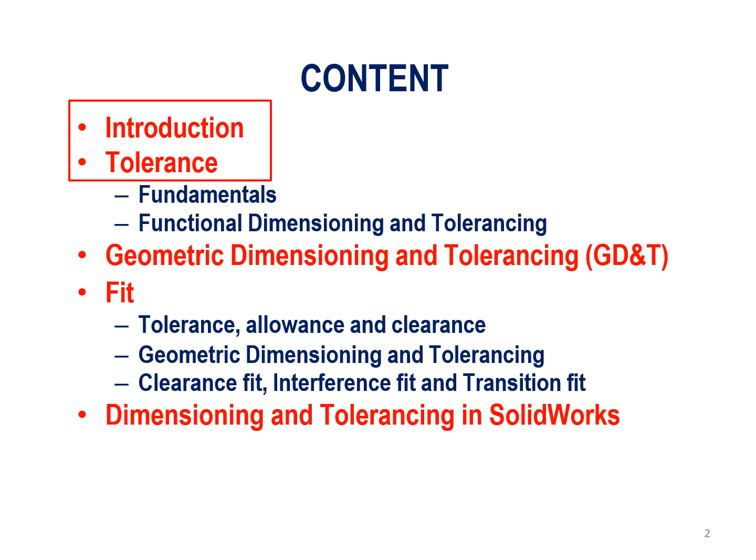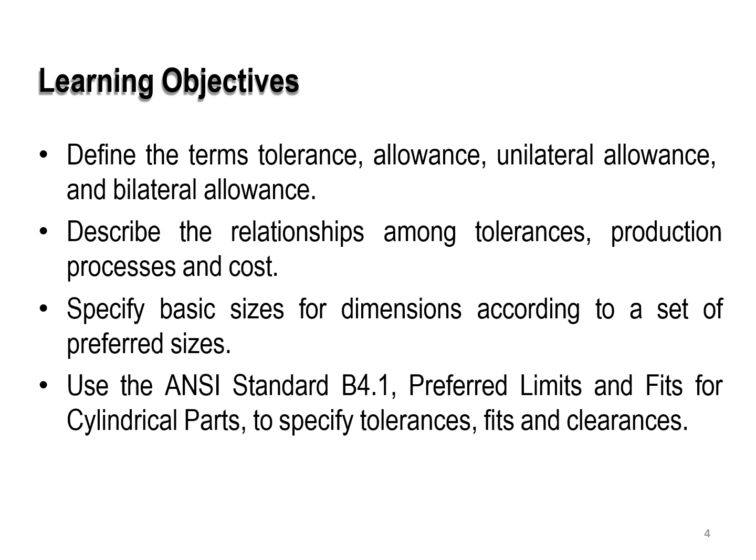The learning objectives of this slide are first to define the terms tolerance, allowance, unilateral allowance, and bilateral allowance. Also, describe the relationships among tolerances, production processes, and cost. Also specify the basic sizes for dimensions according to the set of preferred sizes. We're going to use the ANSI standard B4.1, preferred limits and fits for cylindrical parts, to specify the tolerances, fits, and clearances.

Continuing with that, we are going to specify the transitional, interference, and force fits, specify the appropriate geometric dimensions and tolerancing controls for the mating parts using the CAD software SolidWorks.

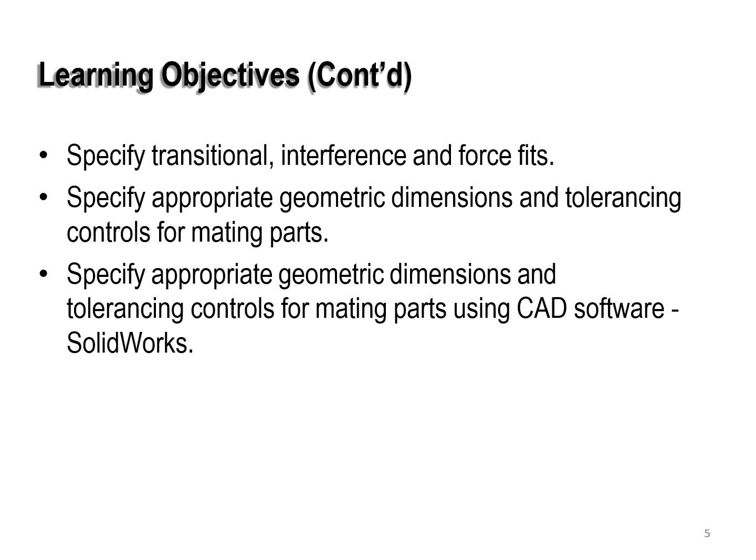So first, let's have a definition for tolerancing and fit. The ISO system of limits and fits is a coordinated system of hole and shaft tolerances for engineering and manufacturing use, for cutting tools, material stock, gauges, and so on. If held to these tolerances, the cutting tools, material stocks, and gauges are going to be generally available throughout the world. The hole basis fits have 4 preferred hole tolerances: H11, H9, H8, and H7.

So you can see that for the hole tolerances, it's mainly capital letters. The shaft basis fits have 4 preferred shaft tolerances: h11, h9, h7, and h6. The difference is we use a small letter. So something like, we're going to have a shaft go inside the hole.

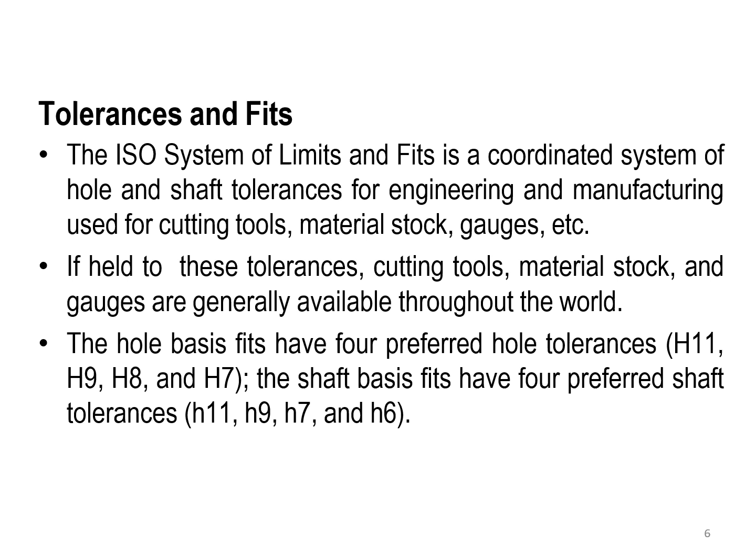So the hole is going to have the tolerance basis using a capital letter with numbers, and for the shaft, which has the smaller diameter, it's going to be a small letter with a number. Usually it's going to have the H.

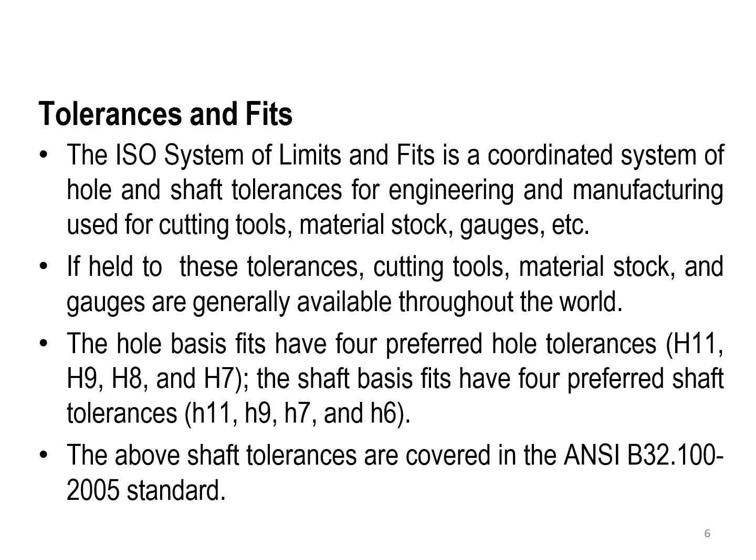The above shaft tolerances are covered in the ANSI B32.100-2005 standard. By the way, ANSI means the American National Standard Institute.

Now let's go once again to the example. We have a needle roller bearing. In the roller bearing, we have the rollers, as you can see here. We call it needle because it's a quite small diameter, and this rolls with the shaft. So the shaft is rotating, and this rolls. We're going to have frictionless contact between the shaft and the hole because the bearing is sitting there. That's one of the examples we have.

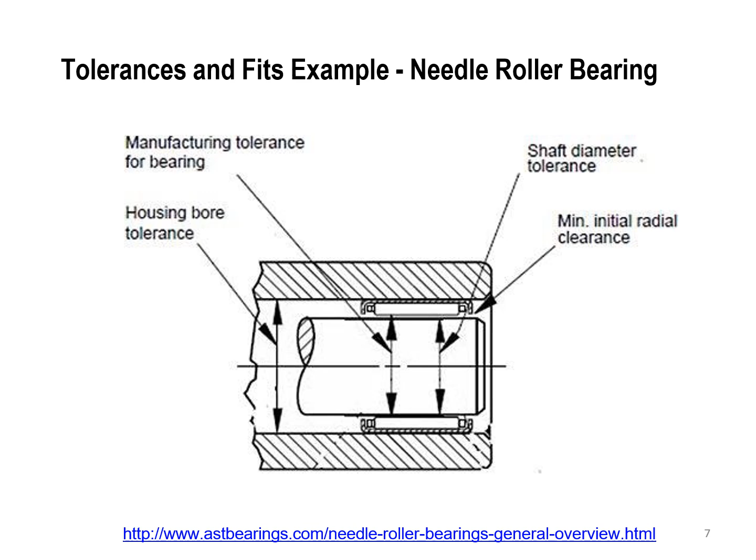So you can see the arrow tells us first the shaft diameter tolerance, which has a maximum and minimum value. The manufacturing tolerance of the bearing has a minimum and maximum diameter. And we have the housing bore tolerances, once again with minimum and maximum diameters. And we have the minimum initial radial clearance between the shaft and the bearing sleeve.

The conceptual design for the speed reducer is introduced as one of the examples we have. We're going to have tolerances between the hole of the bearing, or the inner sleeve of the bearing, and the shaft diameter in all the bearings. Also, we're going to have some tolerances between the hole diameter and the shaft diameter that prevent the oil from slipping.

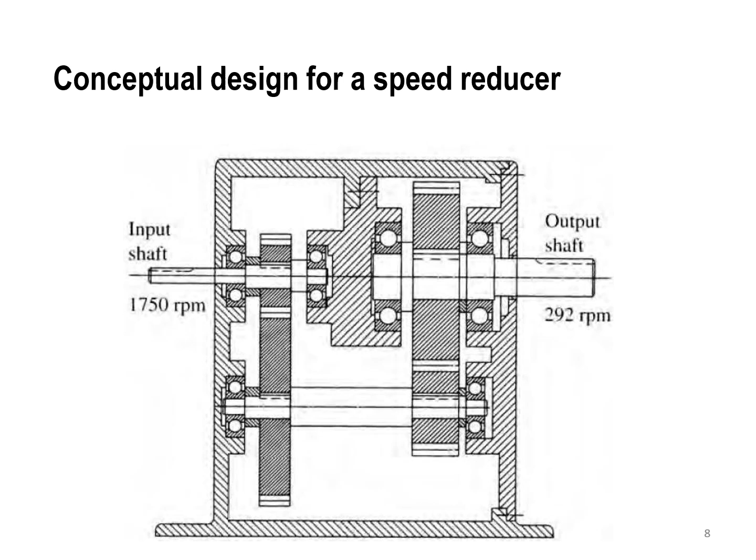We are going to actually add some seals there, and once again we're going to have some tolerances to be done. So here the outside race of the bearing should actually fit inside the hole directly, so we can remove it and fit it in by hand. But in the case of the shaft inside the bearing, this will be added by using force, so it's going to have something like interference, which makes it harder to take off.

So we start with tolerance, and we need to define what tolerance is first. Tolerance is going to be a range between the permissible maximum and minimum limits of the size of the workpiece or distance between the features.

Let's have an example. Say I would like to have a hole that's going to have a shaft sitting in and rotating. The shaft is 25 millimeters, so the hole diameter should be something like 25 up to 25.1. It's either going to fit or be a little larger, because if it's smaller, they'll interfere and won't be able to move. If it's more than 25.1, it will be loose, and this will cause vibration and damage to the shaft.

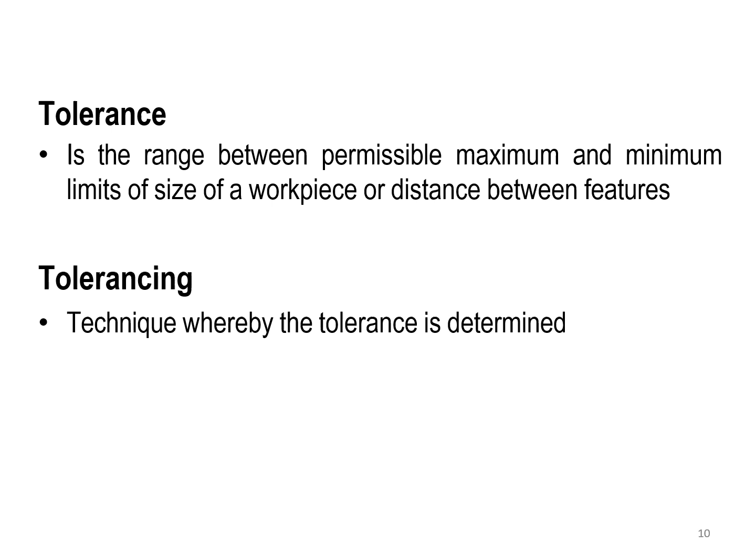So tolerancing itself is the technique whereby the tolerance is going to be determined. We have some functional dimensioning and tolerancing to cover.

These are some of the section drawings for the rotating lever fixed to the machine with the stepped bolt. You can see this has multiple levels, and we have surfaces 1, 2, and 3. These are the parts: this is the bolt, this is the body, and this is the lever.

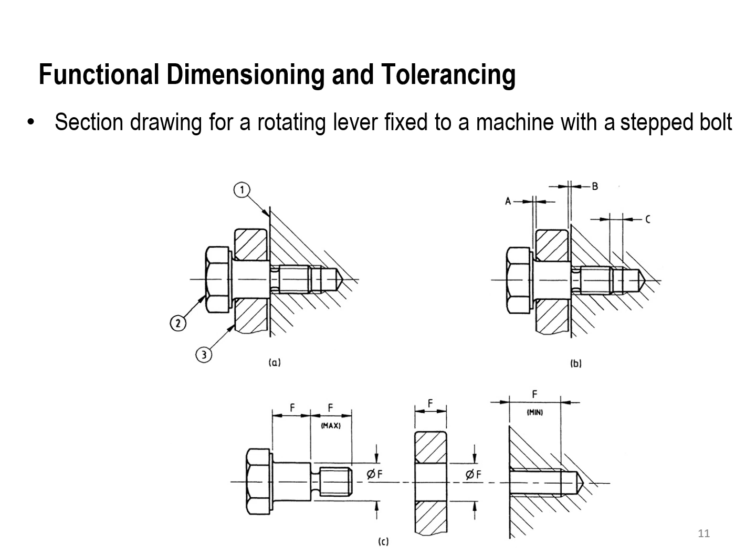Well, I need to explain how this one looks, so I'm going to sketch it roughly. Let me try to make a drawing for this.

So this is the wall, and we're going to have the hole. Over the hole we're going to have a lever that has the ability to swing forward and backward. That's the frame, and that's the lever, and that's the hole. This hole is here, and the hole for the lever is going to be a little bit larger, because the screw is going to have multiple diameters. So the screw is going to be sitting here.

Now we're going to have some tolerances - the screw is going to be fixed with the body or the frame, but it's going to have some freedom of tolerance at this stage.

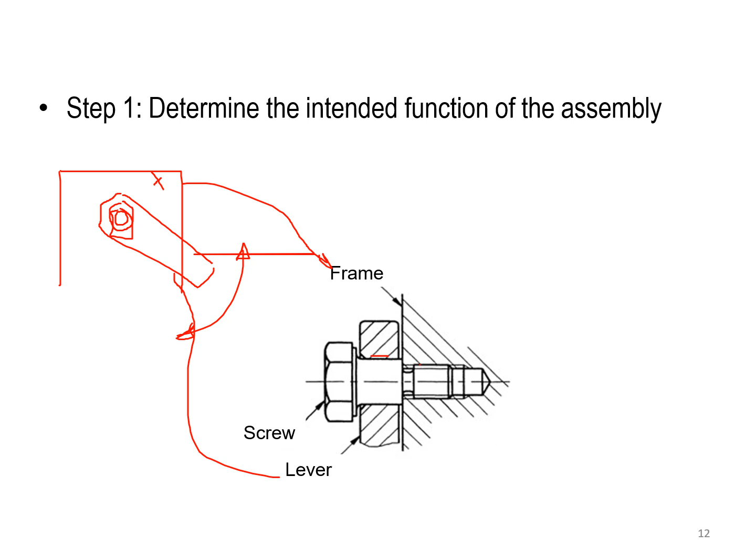Step 1: we're going to determine the intended functions of the assembly. The lever must be able to rotate freely, but without excessive movement in the radial or axial directions with respect to the screw axis.

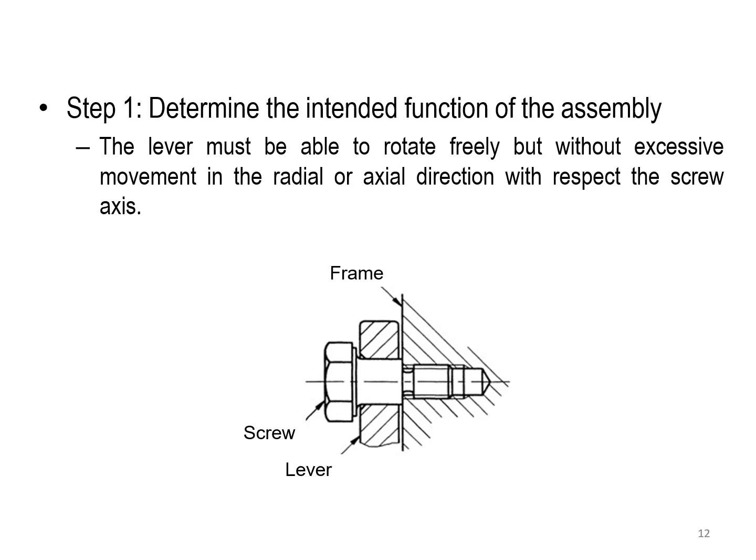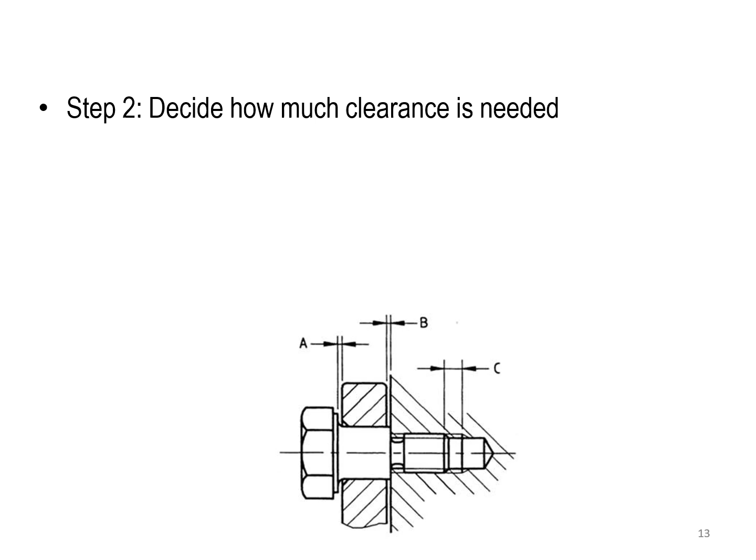Step 2: decide how much clearance is needed. If there's too much clearance, the body will start to have a loose movement, and this will cause damage. So clearance is needed to allow free movement without producing excessive axial movement.

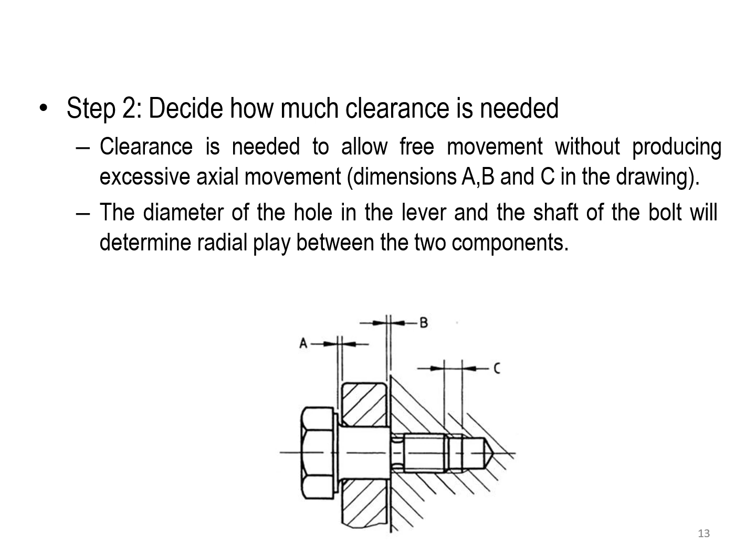So dimensions like A, B, and C in the drawing should allow free movement. They need to be close, but not too much, because too much will cause axial movement - the lever could move left and right, and this is not desirable. The diameter of the hole in the lever and the shaft of the bolt will determine the radial play between the two components. Finally, often these decisions influence the customer's perception of build quality.

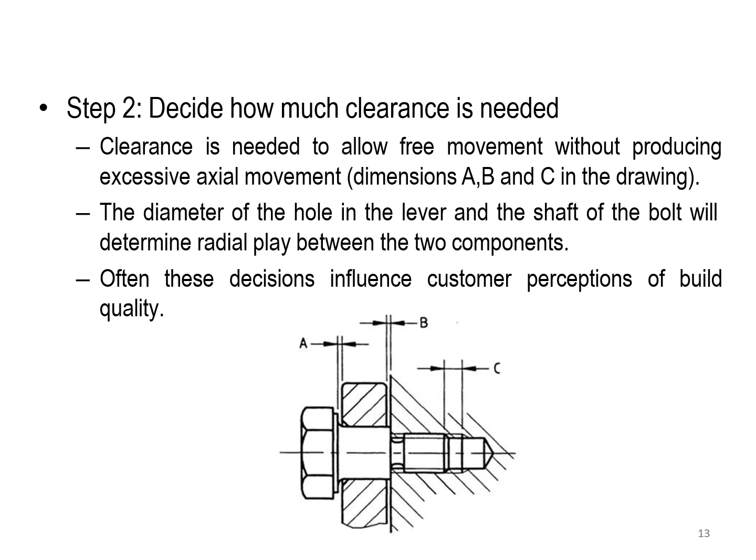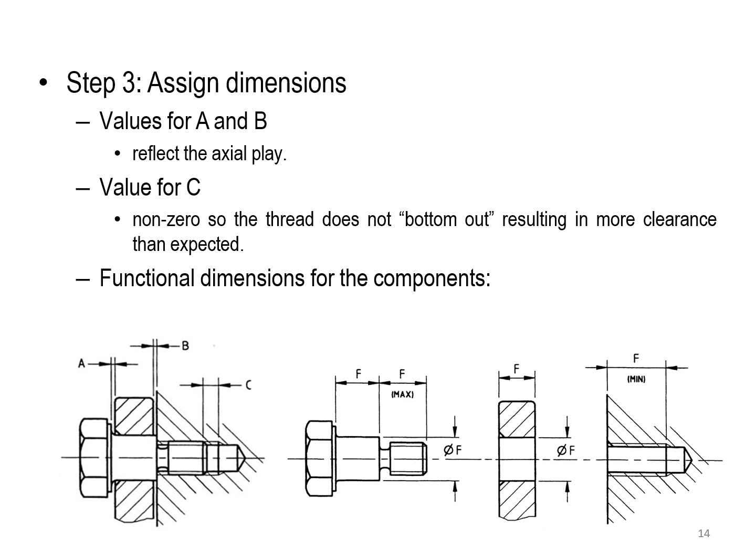Step 4, we're going to specify the size, the form, orientation, and the positions in the drawings. We're going to include each of the dimensions, but doing this directly will clutter your drawing. So use indirect and implicit methods of dimensioning to overcome this problem. You can do either direct dimensioning, indirect dimensioning, or the use of notes and symbols. First, let's see how we can do direct and indirect dimensioning.

Before I show you the next page, let's say I have something like this, a cross section of the shaft. If I say that this distance is going to be 100 millimeters, and that distance is going to be 60 millimeters, so the total is 160, that's direct dimensioning. But if I say that this one is 100 millimeters, and then I remove this one, and I say that from here to here is 160, that means you can find out that this distance here is 60 by indirect dimensioning.

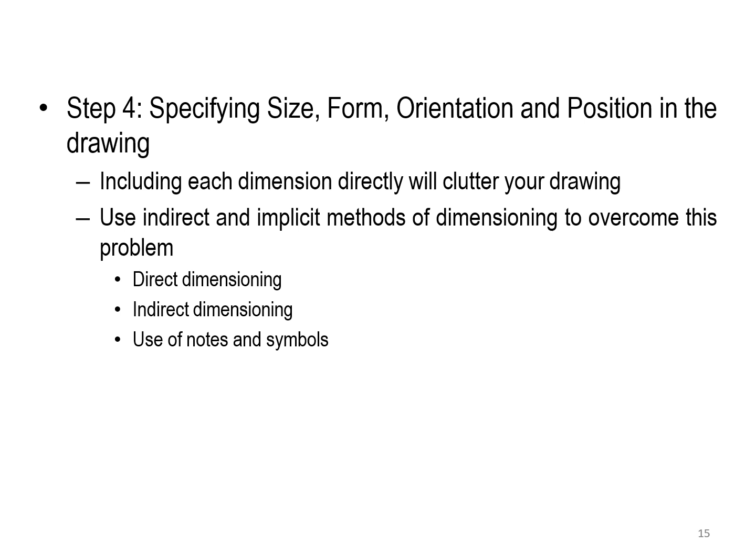Also, we can use some notes and symbols for that. The next page is going to show you this example.

You can see that direct dimensioning is shown here at the top. We can simply just put the lines and put an arrow between them, a dimensioning arrow, and we're going to say this distance is 60. We put plus or minus 0.05, meaning this distance can be 59.95 to 60.05 millimeters in length. We have 40 plus or minus 0.05 for this length, and we have 15 plus or minus 0.1 for that length.

Now let's take a look at the chamfers. All the chamfers have been mentioned. Here we have the diameter of the section, and we have the tolerance for this diameter. So again, it cannot be larger than a value, but it can be smaller, down to 29.85. Same thing we can have for the bigger diameter of the shaft here.

Now here it's not mentioned what the total length of the shaft is, so this will be an indirect dimensioning. You can simply add these three values, and you will get the final dimension. So these are direct and indirect dimensioning.

Here also we can use some notes and symbols. For example, for this diameter, we'll say that we have 4 holes, 1, 2, 3, 4, and the diameter is going to be 15 with a plus 0.3 and 0 at the bottom. So the maximum diameter is 15.3, and the minimum diameter is 15. We cannot go smaller than that.

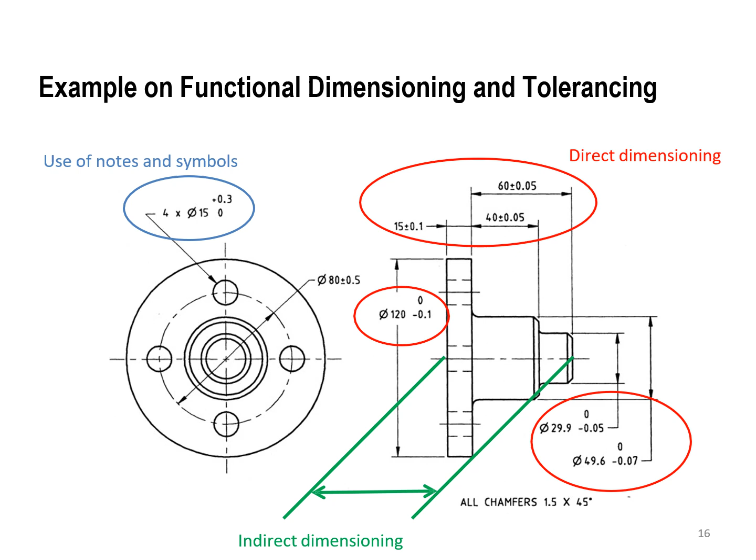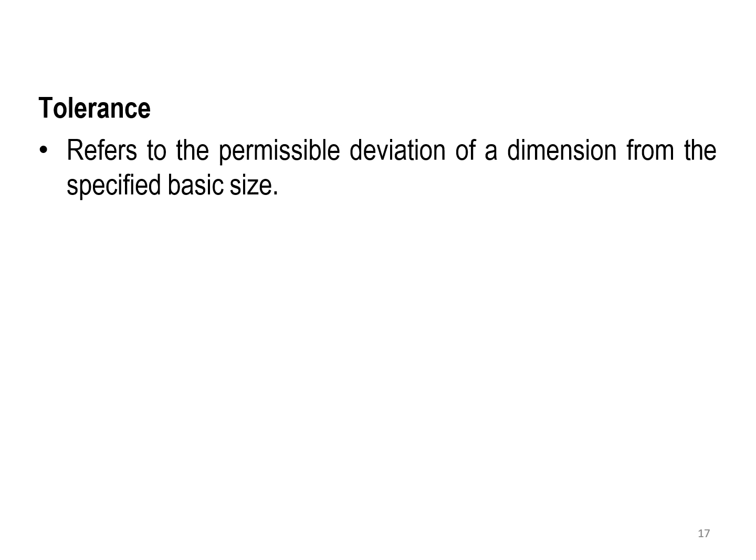So we go back once again to tolerances. Tolerance refers to the permissible deviation of the dimension from the specified basic size — how much more or how much less.

You're going to either have unilateral tolerance, where the deviation is only in one direction from the basic size, either more or less, or we can have bilateral tolerance, where the deviation is both above and below the basic size. The total tolerance refers to the difference between the maximum and the minimum permissible dimension.

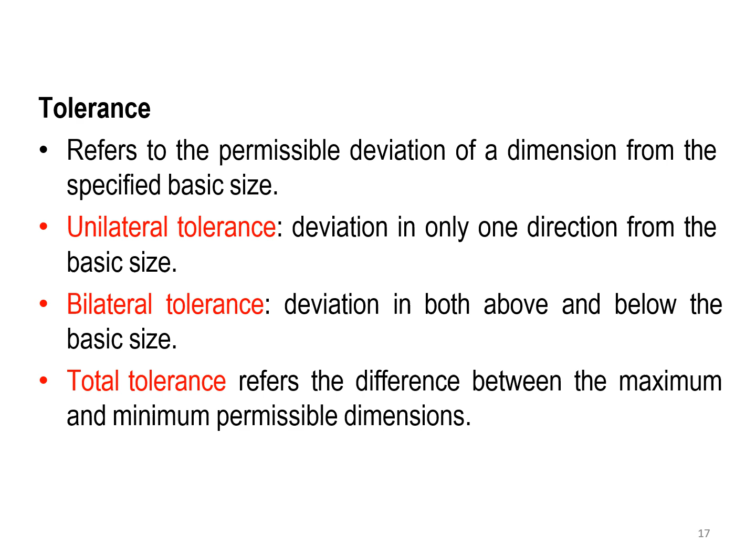The components and their tolerance names are given according to the Australian Standard 1100.101 for technical drawings, general principles, 1992. For size, we can have bilateral, unilateral, and the limits of size.

For form, we can have circularity, cylindricity, flatness, and straightness. For orientation, we can have angularity, parallelism, and perpendicularity. For location, the positions, including concentricity and symmetry. With surface texture, we can have Ra, which is the surface roughness, and various other measures. For profile, we can use the line or the surface, and for run-out, you can use circular or total.

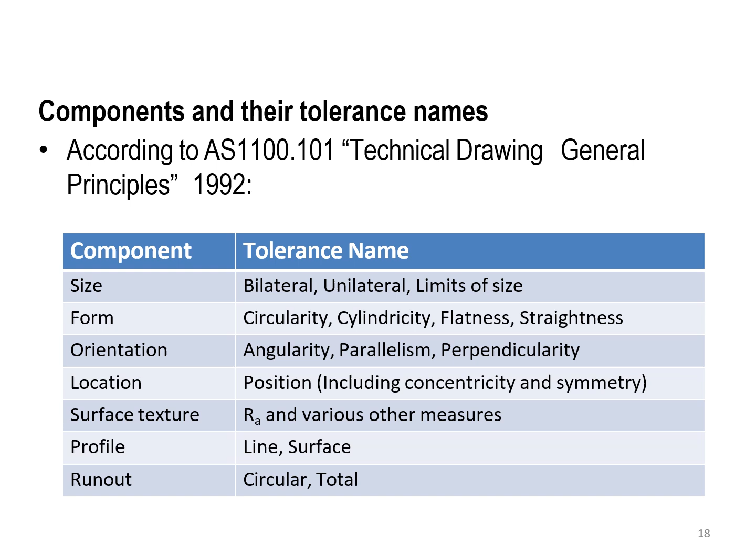The allowance refers to the intentional difference between the maximum material limits of the mating parts. This can be a positive allowance, where for a hole and shaft pair it defines the minimum clearance between the mating parts, from the largest shaft mating with the smallest hole. A negative allowance will result in the shaft being larger than the hole, which gives something like interference. Okay, so now you understand that.

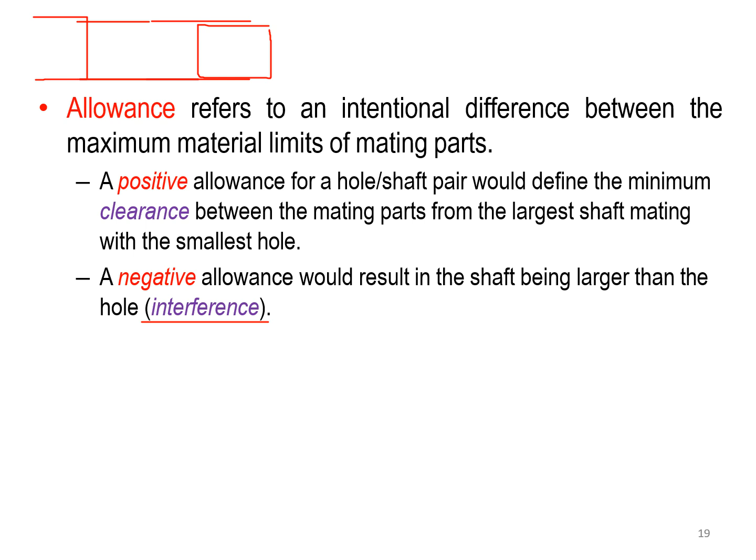Let me sketch that for you. In the case of positive allowance, this will be the hole. We define the minimum clearance between the two mating parts from the largest shaft mating with the smallest hole, meaning the diameter of the shaft is less than the hole. Negative allowance results in the shaft being larger, giving us interference. A positive allowance gives us clearance, meaning the diameter of the shaft is smaller than the diameter of the hole. So that's the positive and that's the negative.

For example, if the dimensions are given as 1.625 plus or minus 0.002, that means the manufactured part may be 1.627 or 1.623 or anywhere between these limit dimensions.

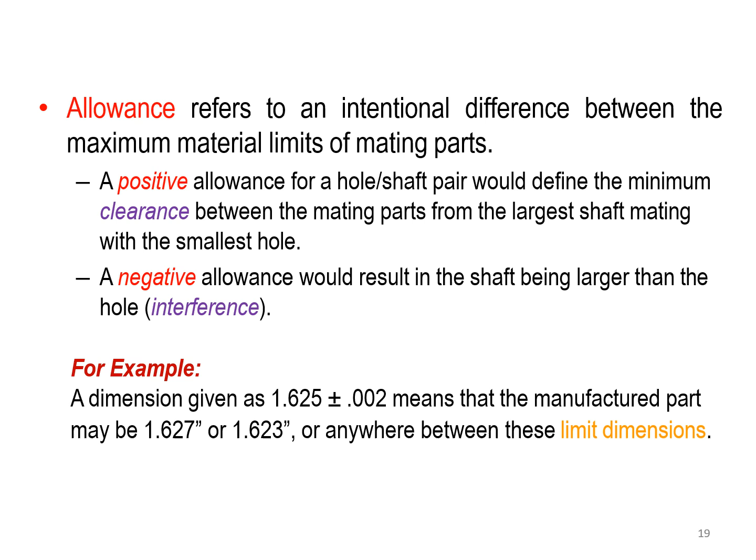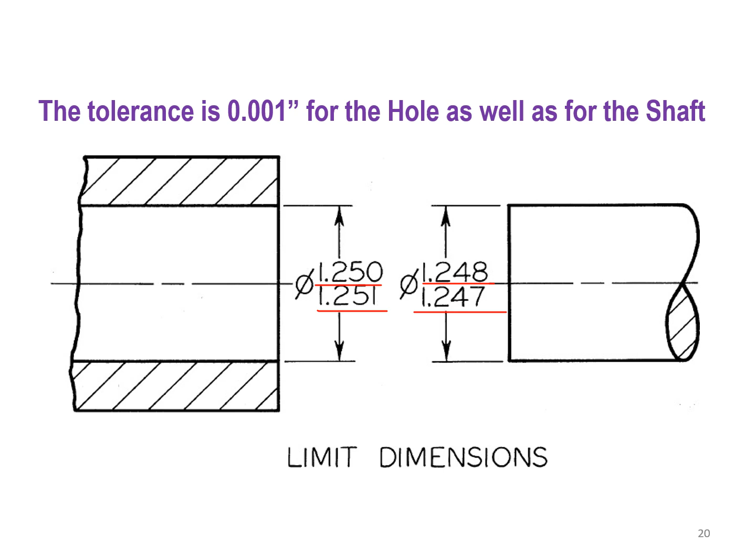The tolerance here is 0.001, or 1 in 1,000 of an inch, for the hole as well as the shaft. You can see the minimum and maximum are given: the minimum diameter of the hole is 1.25 inches, the maximum is 1.251. For the shaft, the maximum is 1.248 and the minimum is 1.247. So the tolerance is 0.001 for the hole as well as the shaft. These are the limit dimensions we have.

Small tolerances usually mean higher cost, as shown in the graph below. If I want very close tolerances, like in the ten-thousandths of an inch, that means I need a more precise machining process, and the cost increases. You can see the increase in machining cost on the y-axis and the total tolerance we can achieve on the x-axis. As we move from micro-inch dimensions from left to right...

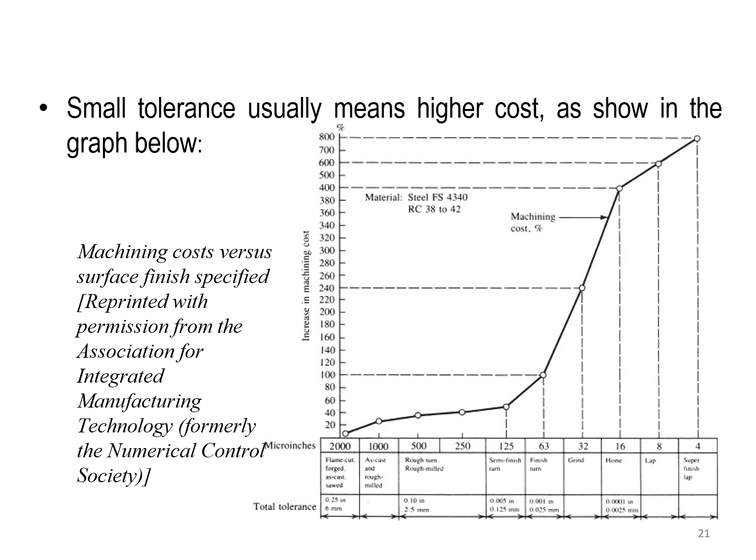Some of the size designations we have are, first, the nominal size. The nominal size is a designation used for general identification and is usually expressed in common fractions. For example, in the previous figure, the nominal size of both the hole and the shaft, which is 1 and a quarter inch, will be 1.25 inches in the decimal system of dimensioning.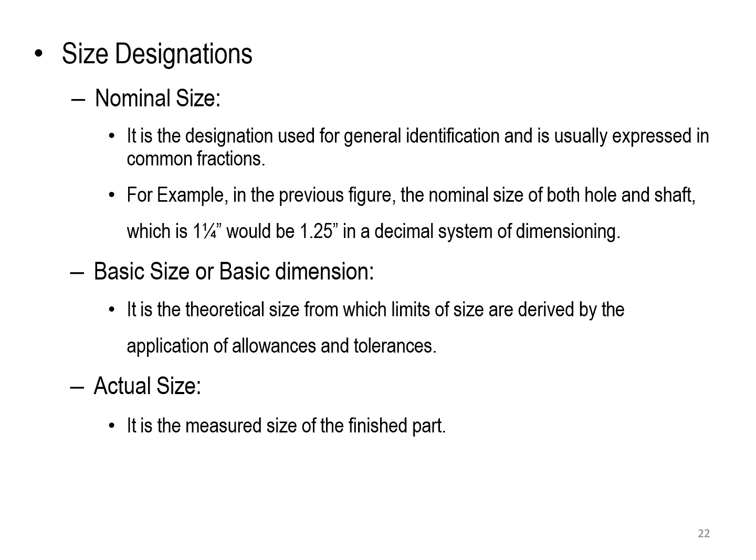The basic size, or basic dimension, is the theoretical size from which the limits of size are derived by applying the allowance and tolerances. The actual size is the measured size of the finished part. The allowance is the minimum clearance space, or sometimes the maximum interference, intended between the maximum material conditions of the mating parts.

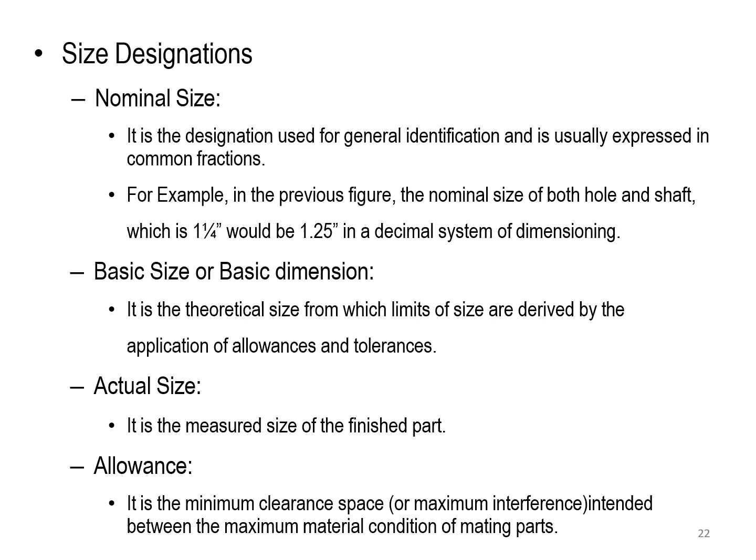Here are some examples for allowance and clearance. The shaft is 1.247 minimum, 1.248 maximum; the hole is 1.25 inches minimum, 1.251 maximum diameter. That means the shaft tolerance is 1.248 minus 1.247, which is 1 in a thousand of an inch. The hole tolerance is the maximum diameter minus the minimum diameter, 1.251 minus 1.25, which is also 1 in a thousand of an inch.

Now we are going to check the loosest fit, which is the smallest shaft and the largest hole.

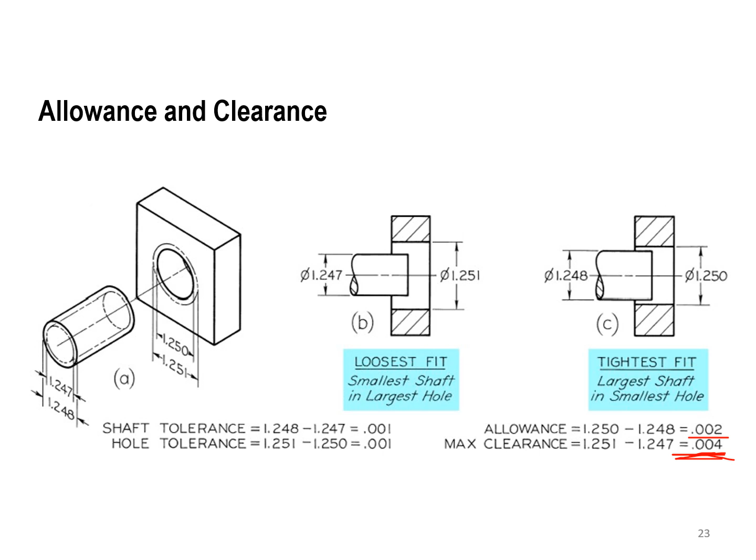The largest hole is going to be 1.251, and the minimum diameter shaft is going to be 1.247. The maximum allowance, or maximum clearance, is the difference between them, which is 0.004, or 4 in 1,000 of an inch. That's the maximum clearance. For the allowance, it's the largest shaft and the smallest hole: the largest shaft is 1.248, and the minimum diameter of the hole is 1.25, so the allowance is 0.002. That means there's always going to be a clearance, and there will be no interference between them.

The basic references for tolerances and fits are the Australian Standards AS1654, which is an ISO system of limits and fits, and the basis of tolerances, deviation, and fits. The ANSI standard B4.1 from 1967 covers preferred limits and fits for cylindrical parts, and this was used in the United States. We also have ANSI B4.2 from 1978, for preferred metric limits and fits, which is the one we're going to use heavily.

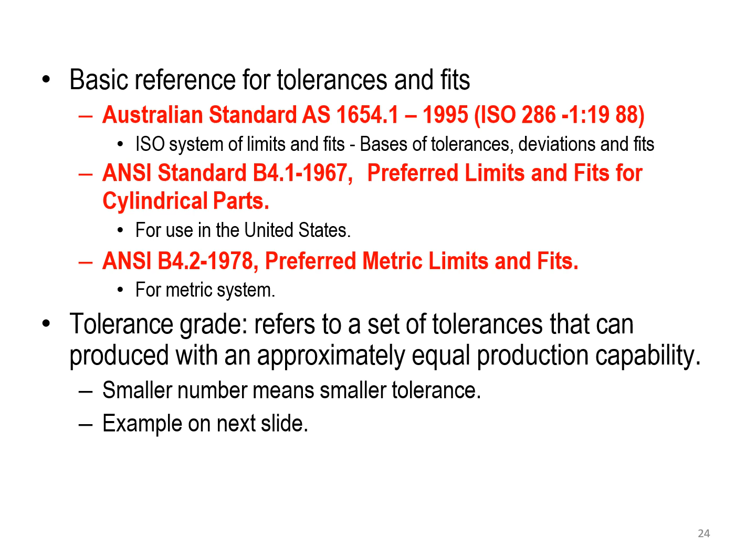The tolerance grade refers to the set of tolerances that can be produced with approximately equal production capability. A smaller number means a smaller tolerance. An example is going to be shown in the next slide.

So here we're going to look at the application and the measuring tool, and the application and the tolerance grade. We start with measuring tools: that's for the tolerance grade. Measuring tools are going to have something like 01 up to 7, that's the tolerance grade for it. If I go to rough forms, like casting, sawing, and forging, it's going to be between 12 and 16. So you can see how bad the tolerance grade is when the number is higher — the smallest is the best, as mentioned in the previous page.

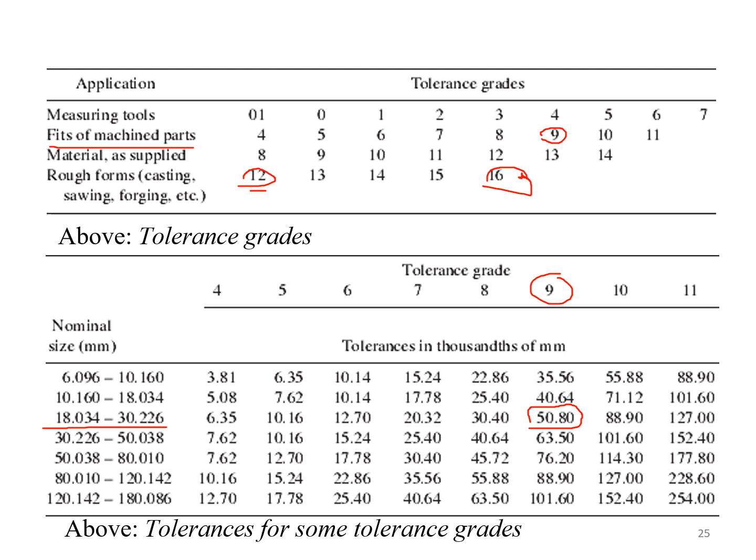Now for the nominal size in millimeters, we have the tolerance in thousandths of a millimeter for different tolerance grades. For example, take the fits of machine parts, grade 9. I'll check what the tolerance will be in millimeters if I have, for example, a hole diameter of 20 millimeters. 20 millimeters falls in the 18 to 30 range. Checking against grade 9, I get 50.8 divided by 1000 of a millimeter as the tolerance value for this hole. That's how we use this table.

For decimal dimensions, the dimensions in inches, the tolerances are as follows unless otherwise stated: xx.x, xx.xx, and we can add to thousandths, and to tenths of thousandths. For angles, we can write it as plus or minus 0.5 degree, where x represents a specified digit we apply. For example, I can write 10.1, 10.15, 10.156, 10.15678, and so on.

Another example: if we're given a dimension with a basic size of 2.5 inches, then the dimension can be stated on the drawings in any of four ways with different interpretations. For example, 2.5 means it's 2.5 plus or minus 0.05, or the limits of 2.55 maximum and 2.45 inches minimum. 2.50 means it's 2.5 plus or minus 0.01, or the limits of 2.51 to 2.490 inches. Whenever we add zeros, the tolerance will always decrease in value, as you can see here.

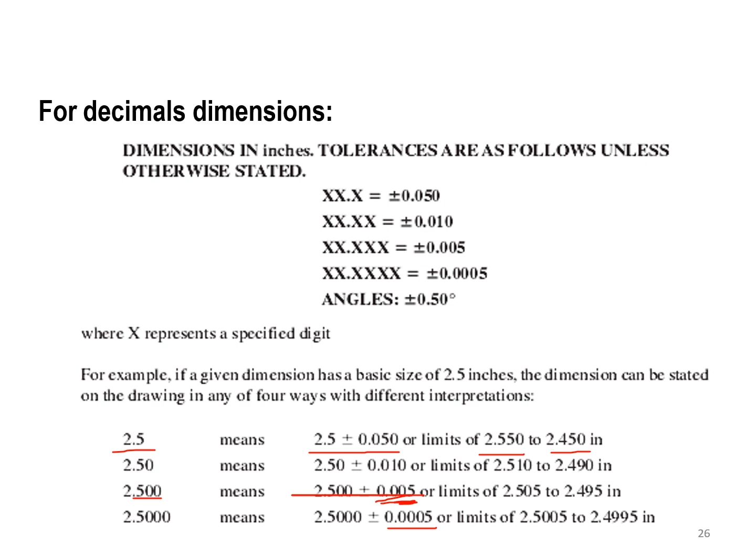The next video is going to cover the second part, geometric dimensioning and tolerancing, which we can shorten as GD&T. That's what we're going to cover in the second video.